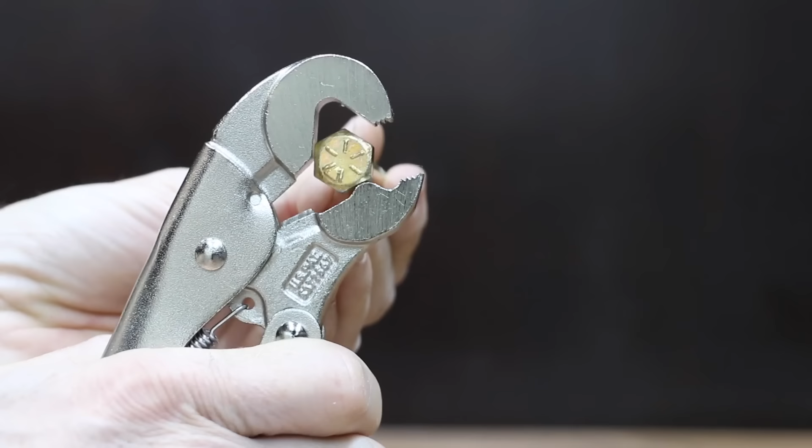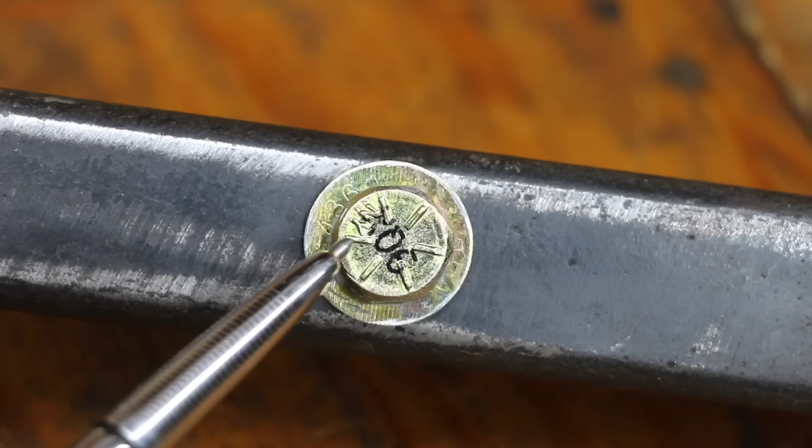I previously tested the socket style rounded nut extractors, but what about the wrench style, which allows you to work in a much tighter space? We have a bunch of different brands, with the least expensive brand only costing $14 and the most expensive brand $469. In the first test, we'll see which wrench performs the best on undamaged bolts. Then we'll see how they perform on partially and completely rounded bolts. Finally, we'll see which wrenches are the most durable.

At a price of $14, the least expensive brand we'll be testing is made by Irwin. Curved jaw delivers maximum gripping power and won't slip or strip any style of nut or bolt. Built-in wire cutter to avoid having to switch tools. The locking wrench is 7 inches in length. The Irwin vice grip is made in Taiwan. If the fastener is in a tight spot, the size of the tool is a factor to consider. With a 7/16" bolt in the jaws, the vice grip needs a lot of real estate at 1.87 inches across.

Some of the tools we'll be testing claim to be designed for both rounded and undamaged bolts. So let's see how much damage is caused by using each of the wrenches on an undamaged 7/16" grade 8 fine thread bolt torqued to 78 foot-pounds. We'll also see how they perform on a partially and fully rounded bolt.

And the vice grips loosen the undamaged bolt without slipping. Unfortunately, the vice grips did cause a small amount of damage to the previously undamaged bolt. And the vice grips lost grip on the partially rounded bolt at 62 foot-pounds. A close look and the jaws actually stretch as they lose grip. 20 foot-pounds on the completely rounded bolt.

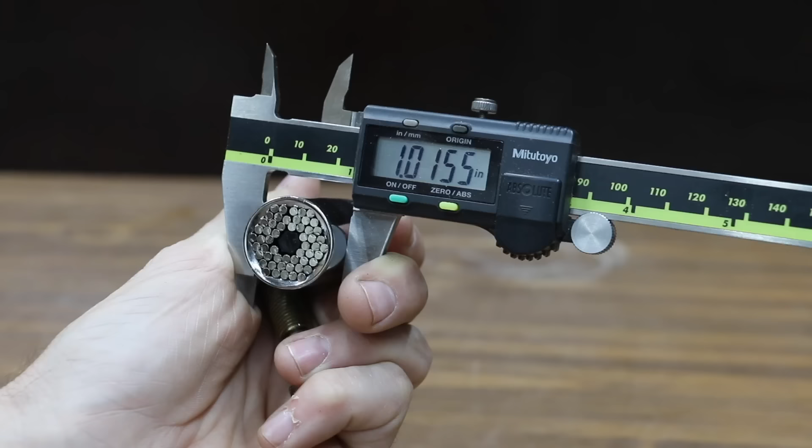At a price of $15 is this locking adjustable wrench that's made by Stanley. The wrench is 10 inches or 250 millimeters in length. Stanley claims that this wrench will allow for a tight grip on rounded fasteners to prevent the wrench from slipping off during use. Fits fasteners up to 1.25 inches in diameter. The Stanley is made in China. 2.03 inches for the locking adjustable wrench.

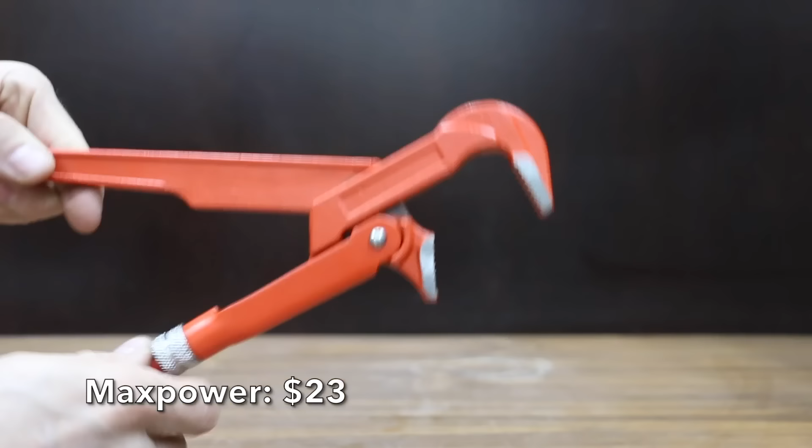And the locking adjustable wrench made easy work of the undamaged nut. As the bolt reaches loosening torque, the wrench jaw stretched enough to cause damage to the corner of the bolt. And the locking adjustable wrench lost grip on the partially rounded bolt at 43 foot-pounds, or about 19 foot-pounds less than the vice grips. And there's a small amount of damage to the wrench. And it made it to 16 foot-pounds on the completely rounded bolt.

At a price of $16 is this universal socket. The manufacturer claims that this one tool can replace the whole set. Fits fastener sizes 1/4 inch to 3/4 or 7 to 19 millimeters. It even comes with a power drill adapter. The universal socket is made in China. And the universal socket has the smallest diameter at 1.02 inches. And the universal socket successfully loosened the undamaged bolt, but the steel pins in the socket caused minor damage to the bolt. And the universal socket gave up early on the partially rounded bolt at only 9 foot-pounds.

At a price of $23 is this Maxpower brand Swedish pipe wrench. Maximum jaw opening is 1 9/16 or 40 millimeters. The wrench is 12 inches in length. It has a knurled steel adjustment nut. The Maxpower is made in China. And a pipe wrench uses the most amount of space yet at 2.3 inches.

And a pipe wrench has very aggressive teeth and caused a lot of damage to the bolt. The teeth on the pipe wrench also experienced some damage. And a pipe wrench is the first tool in the lineup to loosen the partially rounded bolt. And a pipe wrench is also the first tool in the lineup to successfully remove the completely rounded bolt.

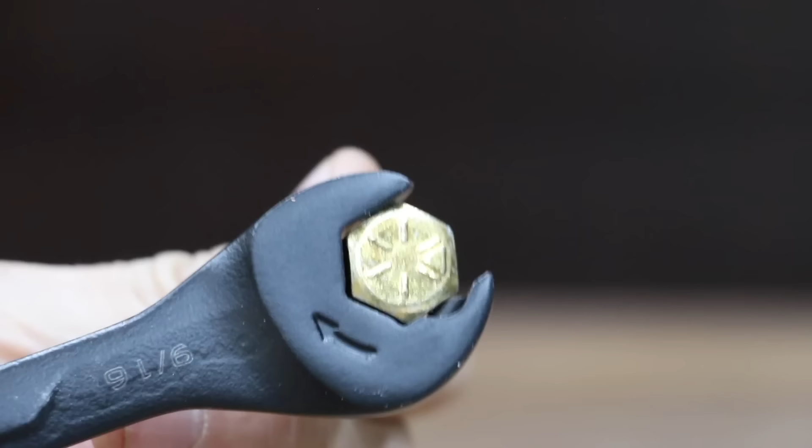At a price of $24 is this Duratech Universal Wrench set. The wrenches work with SAE or metric. Fit sizes 5 to 27 millimeters or 3/16 to 1 11/16 inch. The manufacturer claims that the wrench set works very well with rounded fasteners. The Duratech is made in China. 1.65 inches for the Duratech.

And the Duratech is able to loosen the undamaged bolt without a problem. However, the jaws on the Duratech do appear to be pretty soft, and there's quite a bit of damage to the jaws.

There's also some very minor damage to the bolt. And the Duratech lost grip on the partially rounded bolt at 33 foot-pounds.

At a price of $30 is this Crescent brand. It claims to fit 6 different fastener types, including hex, square, 12-point, E-Torx, partially rounded, and spline. The ratcheting end of the open wrench allows you to remove and apply nuts and bolts without removing the wrench. The Crescent brand is made in China. 0.987 inches for the closed end and 1.36 for the opened end.

And the Crescent made easy work of loosening the undamaged bolt, but the Crescent wasn't able to gain any traction on the partially rounded bolt.

At a price of $33 is this Bionic Wrench as seen on TV. The 6 jaws slide towards the center and lock onto the head of the nut or bolt. It claims to offer 14 wrenches in one. Fit sizes 7/16 to 3/4 or 11 millimeters to 20. The Bionic Wrench is made in USA. Very close to 2 inches for the Bionic Wrench.

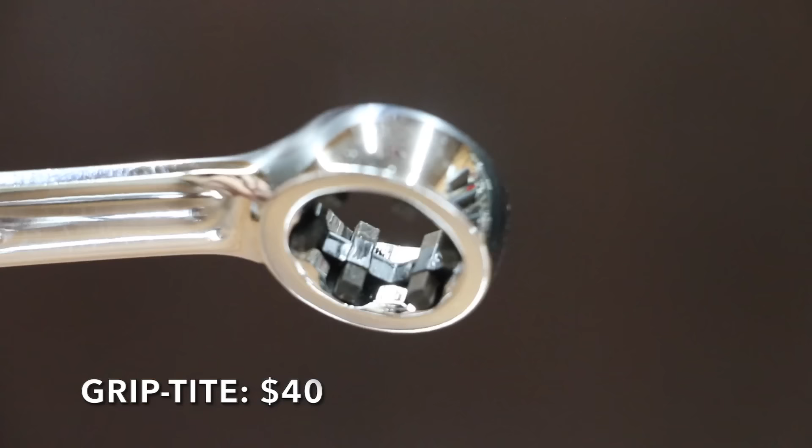And the Bionic Wrench will definitely get the job done if you have a Bionic grip. I gave the Bionic Wrench my best grip on the partially rounded nut and made it to 32 foot-pounds before losing grip. Unfortunately, the Bionic Wrench did experience some minor damage.

At a price of $39 is this Magic Wrench brand. It's a multi-purpose self-adjust double heads ratcheting all-in-one wrench. Fit sizes 9 to 45 millimeters. It claims it can remove nuts and bolts that have been completely stripped. The Magic Wrench is made in Korea. 2.31 inches for the Magic Wrench.

And I wasn't able to work any magic on the undamaged bolt, and the Magic Wrench lost grip at 48 foot-pounds. However, the Magic Wrench did mangle the previously undamaged bolt head.

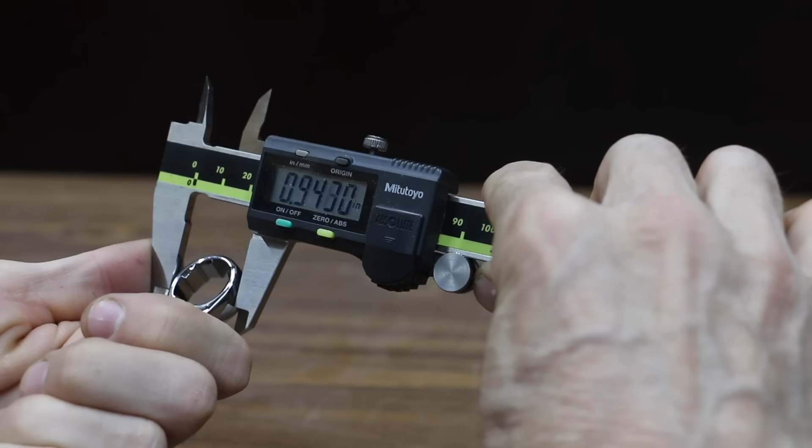At a price of $40 for 6 wrenches, or about $6.67 per wrench, is this Griptite brand. The open end of the wrench looks like a standard wrench. They claim that the wrenches can grip even rounded bolts. Some of the wrenches work with both SAE and metric. They claim that the more torque you apply, the harder the cams grip. There's no information on the packaging regarding where the Griptite wrenches are manufactured. 1.1 inches for the closed end and 1.37 for the opened end.

And the Griptite made very easy work of the first bolt, and it does seem to offer a very tight grip as the name implies. Unfortunately, the Griptite lost grip on the partially rounded bolt at 55 foot-pounds, which is just a little better than average. However, the closed end of the Griptite experienced 2 broken teeth and the wrench is now ruined.

At a price of $64 is this Olsa Tools Bolt Extractor Offset Wrench Set. 6 wrenches fit 12 sizes from 1/4 to 3/4 of an inch. It's a regular set of closed-end wrenches, but it has an innovative design that helps extract damaged nuts and bolts. The Olsa Tools is made in Taiwan. 0.94 inches is the most compact closed end yet.

And the Olsa Extractor wrench easily removed the undamaged bolt. And the bolt looks almost as good as new with a small amount of damage to one of the corners. And the Olsa Tools has more than enough grip to remove the badly rounded fastener, but the wrench just couldn't gain a good grip on the completely rounded bolt.

We previously tested the Rocket Socket brand, so let's test them again against these wrenches. Works with fasteners 1/4 to 3/4 inch or 6 to 19 millimeters. The Rocket Socket is made in USA, and the Rocket Socket is even more compact than the Olsa at 0.89 inches. And the Rocket Socket is designed to remove rounded bolts, and it did just fine on the undamaged bolt. As expected, the Rocket Socket did cause some damage to the bolt.

After a few light taps with the hammer, the Rocket Socket made easy work of the partially rounded bolt, and the Rocket Socket maintained a good grip on the fully rounded bolt, and the bolt finally loosened at just over 56 foot-pounds.

At a price of $90 or just over $3 per wrench is this GearWrench brand. Nothing fancy about the closed end of the GearWrench, it's just a 6-point combination wrench. We'll see how the GearWrench performs against some of the other styles of wrenches. They claim that their off-corner loading reduces fastener rounding.

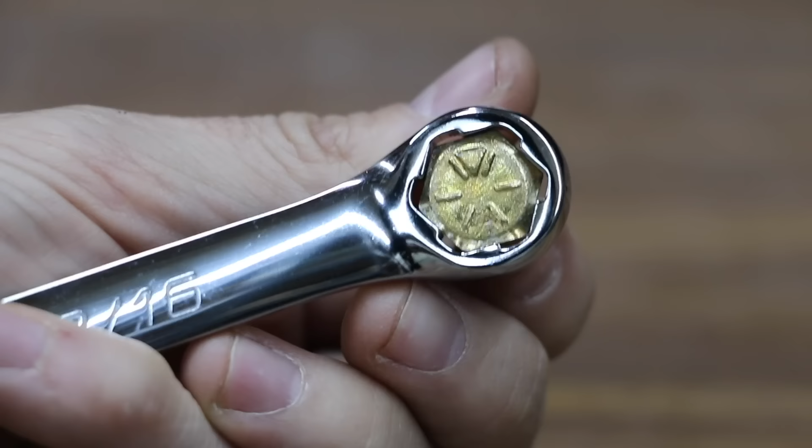The GearWrench wrenches are made in China. 0.95 inches for the closed end and 1.28 inches for the open end is the most compact yet. And a 6-point GearWrench has more than enough grip to loosen the undamaged fastener, and the bolt still looks as good as new. And the GearWrench repositioned itself to take advantage of the flat areas on the partially rounded bolt. And the GearWrench just wasn't able to gain any traction on the completely rounded bolt.

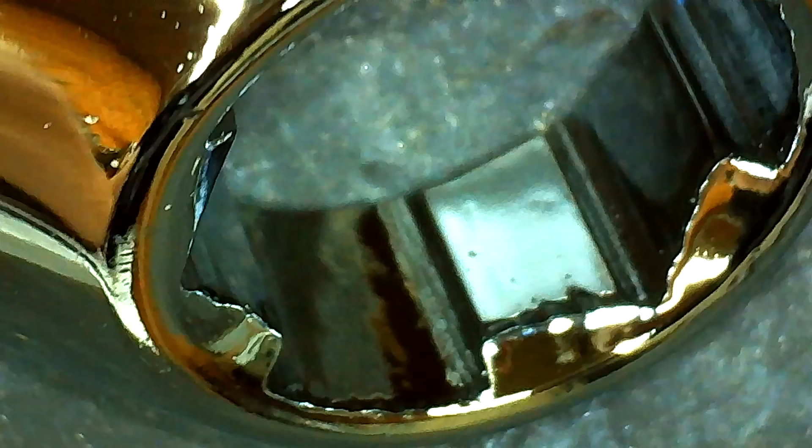At a price of $98 for 8 wrenches or $12.25 each is this Capri Tools brand. Capri Tools claims that their wrenches remove stripped bolts up to 90% rounded. Sizes 5/16 to 3/4 of an inch. 40% longer handle for added leverage. The wrenches are made in Taiwan. 0.98 inches for the closed end and 1.37 for the open end.

And the Capri Tools maintain very good grip on the undamaged fastener. However, the wrench does apply a lot of pressure away from the corners, which causes damage to the bolt. A close look at the wrench, and it appears that the chrome plating on the wrench is crumbling. And the Capri Tools found plenty of grip on the partially rounded bolt, and the bolt loosened at 61 foot-pounds. Not enough surface area on the completely rounded bolt.

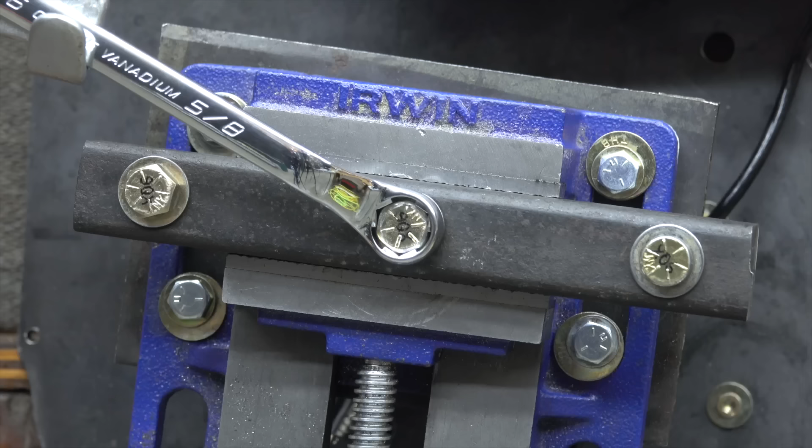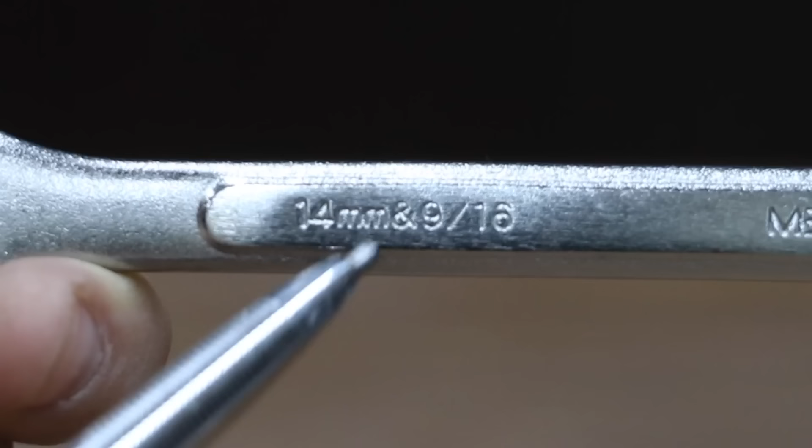At a price of $153 for 19 wrenches, or just over $8 each, is this MichealPro brand. It claims to be a bolt extractor set wrench and cushion grip socket set. Acts as a regular box end as well as an extractor wrench. They claim that their 6-point and 3-cornered box end design shields fasteners from damage under high torque situations. Grip sockets have patented cushions that prevent fasteners from damage. Includes sizes 6 to 19 millimeters and 1/4 to 3/4 inches. The MichealPro is made in Taiwan. 0.927 inches for the MichealPro is the second most compact wrench yet.

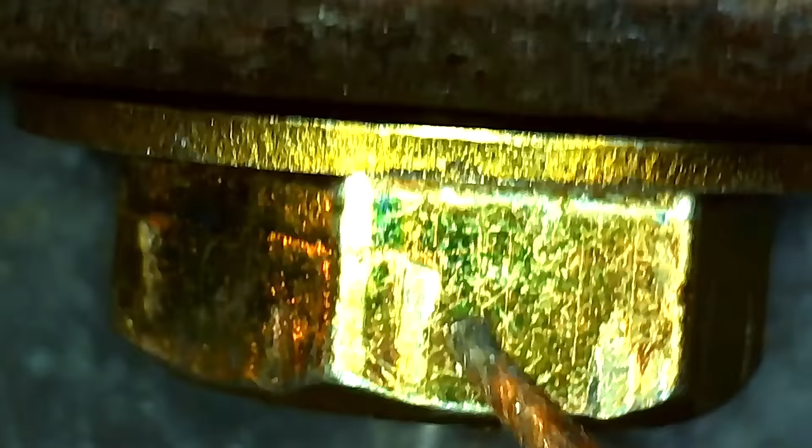And the MichealPro looks a lot like the Capri Tools, and it performed like it too, making easy work of the undamaged bolt. However, the MichealPro did hold up a lot better without any visible damage to the wrench. And the MichealPro has more than enough surface area to work with, and the partially rounded bolt began moving at 62 foot-pounds. And there's not enough surface area on the completely rounded bolt.

At a price of $190 for 14 wrenches or $13.57 each is this Metrinch brand. It claims to be equivalent to a 41-piece conventional set. They claim these wrenches handle standard, metric, and even ones with rounded and worn edges. Sizes from 8 to 22 millimeters or 5/16 to 7/8 of an inch. The Metrinch is made in Taiwan. And the Metrinch is pretty bulky at 1.05 inches for the closed end and 1.41 for the open end.

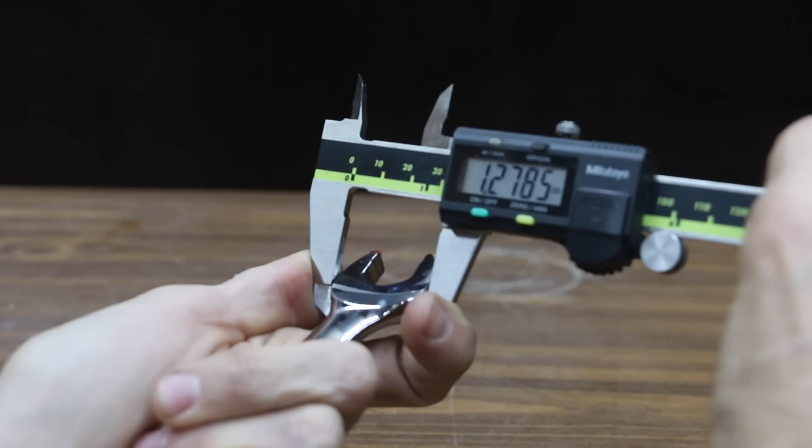And the Metrinch performed just fine loosening the undamaged bolt. However, the wrench does have a lot of taper, and the splines apply pressure to only about 70% of the bolt head. And a partially rounded bolt began loosening at 67 foot-pounds. And there's just not enough surface area for the rounded bolt.

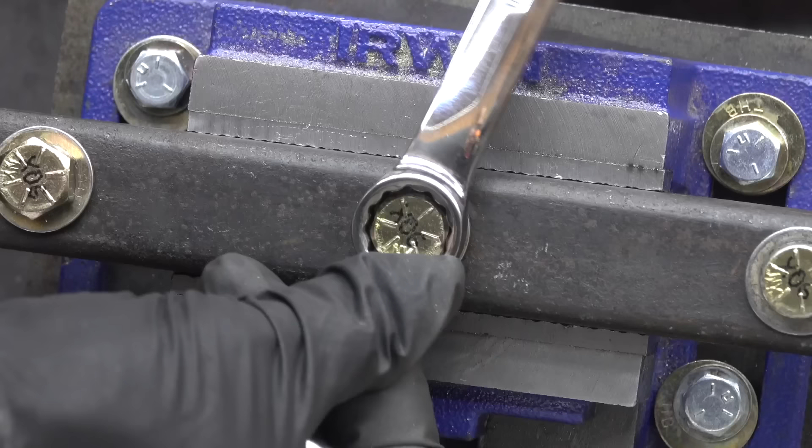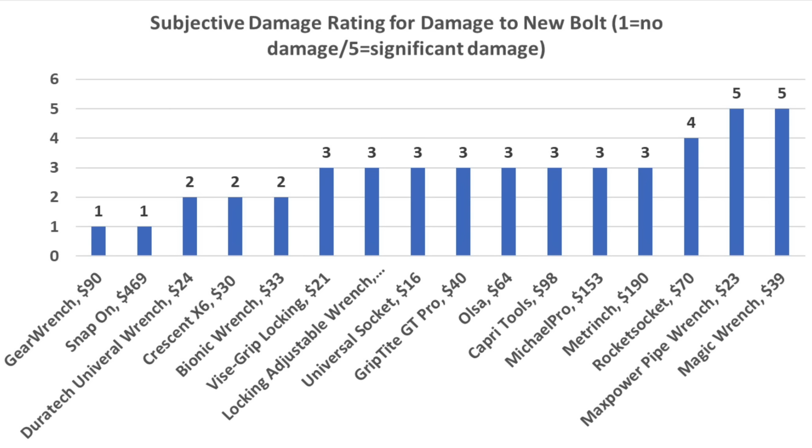And the most expensive brand we'll be testing, at an eye-watering price of $469 for just 7 wrenches or $67 each, is made by Snap-on. Snap-on claims that their Flank Drive Plus wrenching on the open end provides up to 62% more turning power and strength. Snap-on does not claim that these wrenches are specifically designed for rounded fasteners, but I've had a lot of people request that I test them. They claim that their box end provides up to 15 to 20% more turning power. The Snap-on wrenches are made in USA. 0.92 inches for the closed end and 1.28 for the open end is very well designed for tight spaces.

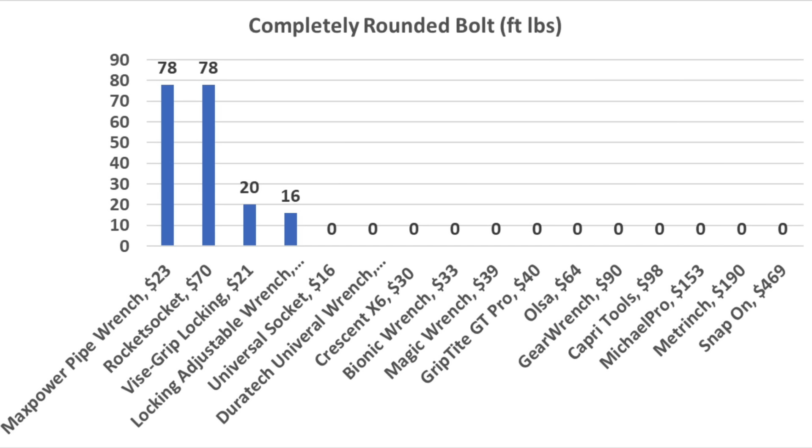And the Snap-on made very easy work of the undamaged bolt, and the bolt began loosening at 63 foot-pounds. The Snap-on wrench provides more than enough contact area to avoid causing any damage to the bolt. And the Snap-on just wasn't able to get a grip on the partially rounded bolt. No visible wear and tear with the Snap-on. So all of the tools were able to loosen the undamaged bolt except for the magic wrench.

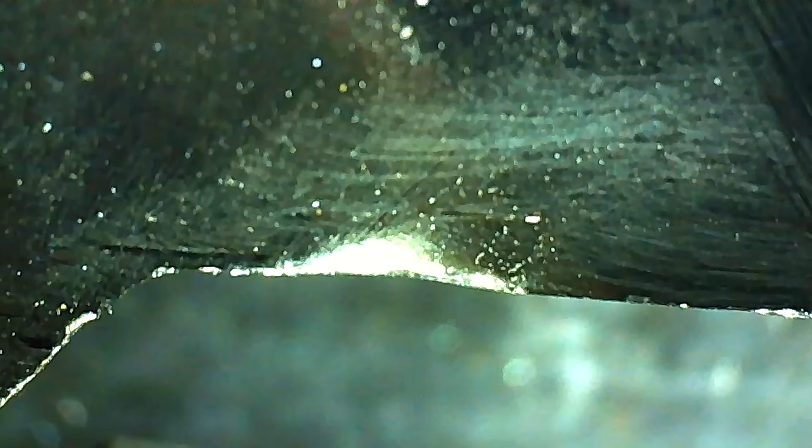Tool design can definitely have an impact on the durability of fasteners. While assessing damage is highly subjective, the GearWrench and the Snap-on cause the least amount of damage to the bolt with the best possible rating of 1. The number 78 on the chart indicates that the bolts were loosened. Only 7 of the 16 brands were able to loosen the partially rounded bolt. For the completely rounded bolts, only the pipe wrench and the rocket socket were able to loosen the bolt.

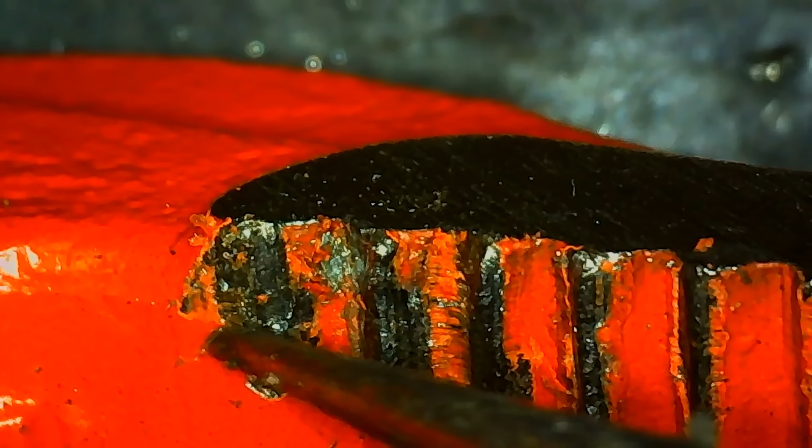Let's test the open end of the wrenches for maximum torque next using the same grade 8 bolts. With 3 points of contact, the Vise-Grips perform very well at 100 foot-pounds. And the Vise-Grips also perform very well on the partially rounded bolt at 49 foot-pounds. However, the Vise-Grips did experience some damage.

Adjustable wrenches have a well-deserved bad reputation for rounding nuts and bolts, but the locking design is really helping the Stanley. And 83 foot-pounds is pretty respectable. And the adjustable wrench performed fairly well on the partially rounded bolt at 41 foot-pounds. However, the adjustable wrench did experience some damage during the test.

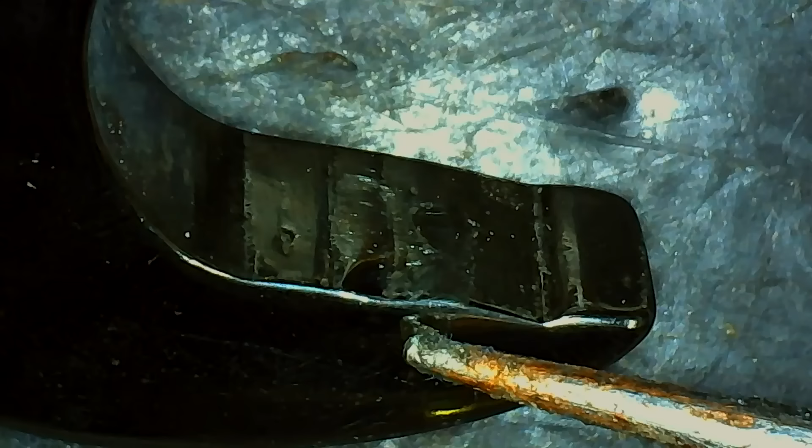Just like the Vise-Grips and the locking adjustable wrench, the pipe wrench is very large and not well designed for tight spaces. However, 99 foot-pounds is almost as good as the Vise-Grips. And the pipe wrench performed just as well on the partially rounded bolt at 99 foot-pounds. And the teeth on the pipe wrench did experience quite a bit of wear and tear.

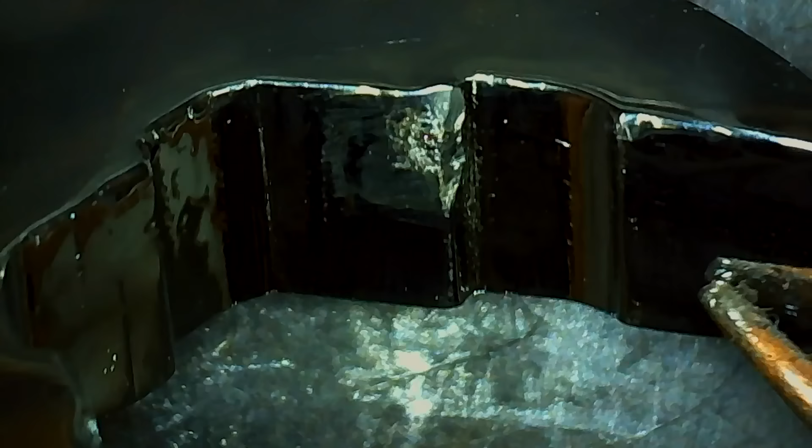Having a moving part on the jaws of a wrench seems like a problem waiting for a place to happen. And the Crescent made it to 93 foot-pounds when the wrench let go. And the moving part on the Crescent wrench broke and the open end wrench is now ruined.

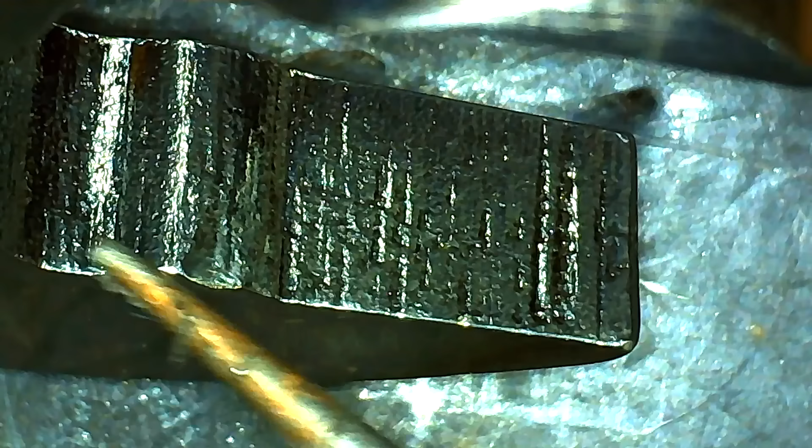And the Griptite performed well, making it to 75 foot-pounds on the undamaged bolt before losing grip. Unfortunately, the Griptite will never perform as well again since it experienced damage from the bolt. And the Griptite just didn't grip very well on the partially rounded bolt at only 15 foot-pounds.

And the GearWrench performed almost as well as the Griptite, making it to 73 foot-pounds before rounding the bolt. However, there's no visible damage to the GearWrench, which should help it on the partially rounded bolt. And the GearWrench performed quite a bit better on the partially rounded bolt at 23 foot-pounds to move into the lead.

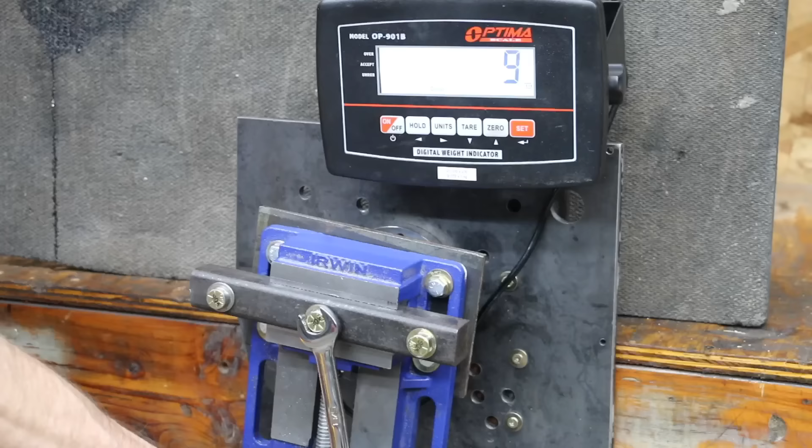And the Capri Tools performed the same as the GearWrench at 73 foot-pounds on the undamaged bolt. However, the high torque load did come at a cost with some damage to the wrench. And the Capri Tools gave up early on the partially rounded bolt at only 9 foot-pounds.

And the Metrinch performed far better than anticipated, making it to 88 foot-pounds before giving up. However, the high torque load did come at a cost with some damage to the wrench. And the Metrinch performed about average on the partially rounded bolt at 15 foot-pounds.

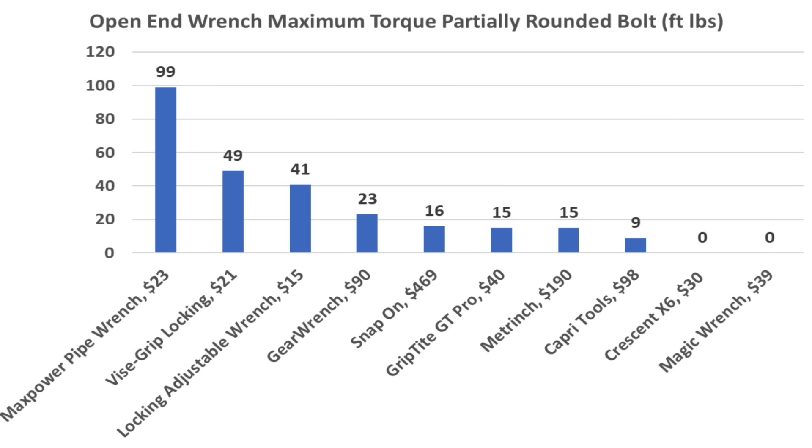And the Snap-on brand claims that the open-end design of their wrench gives it an advantage over the competition. Of all the combination-style wrenches, the Snap-on performed by far the best yet with a very impressive 97 foot-pounds before rounding the bolt. And the Snap-on held up very well with a small amount of wear and tear to the wrench. And the Snap-on made it to 16 foot-pounds before slipping on the partially rounded bolt.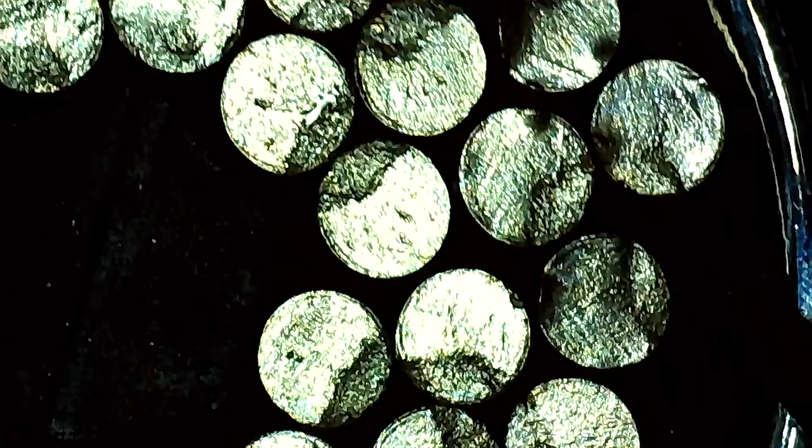Looking at just the open-end wrench performance, the vice grips came out on top at 100 foot-pounds, but the pipe wrench finished in a close second at 99. If you need a much more compact tool, the Snap-on performed almost as well at 97 foot-pounds. If you're dealing with a partially rounded fastener, an open-faced wrench is at a huge disadvantage, and the pipe wrench came out on top at 99 foot-pounds. The locking pliers finished in second at 49, and the adjustable wrench 41 foot-pounds.

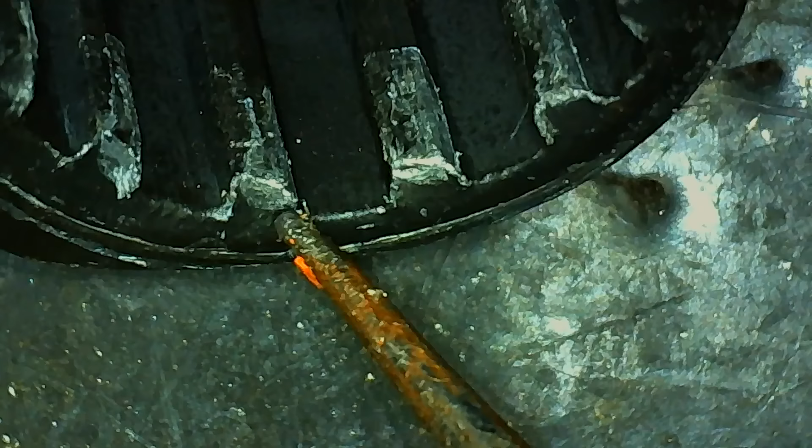Up next, let's compare the tools that make contact with all 6 sides of the fastener. And the Universal Socket made it to 80 foot-pounds before slipping, or 20 foot-pounds less than the vice grips. And the Universal Socket made it to 46 foot-pounds on a partially rounded bolt. However, some of the steel pins experienced some damage.

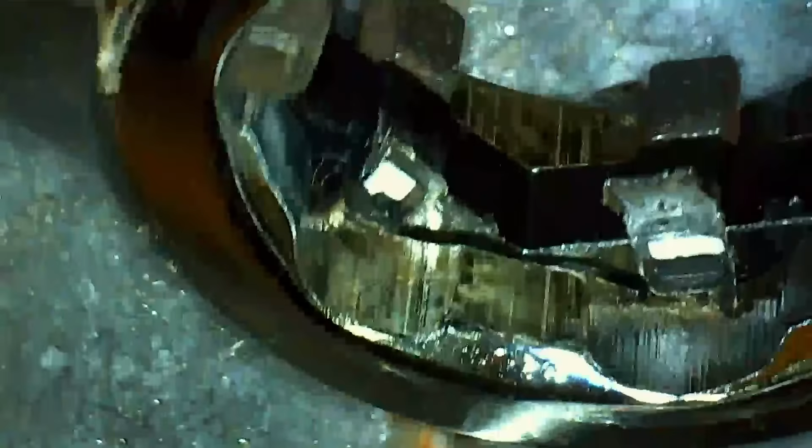And the Duratech makes contact with 4 sides of the bolt. And the Duratech performed well at 108 foot-pounds before losing grip. The Duratech previously lost grip on the partially rounded bolt at only 33 foot-pounds. Durability seems to be an issue with the Duratech, and it's pretty soft and experienced quite a bit of damage.

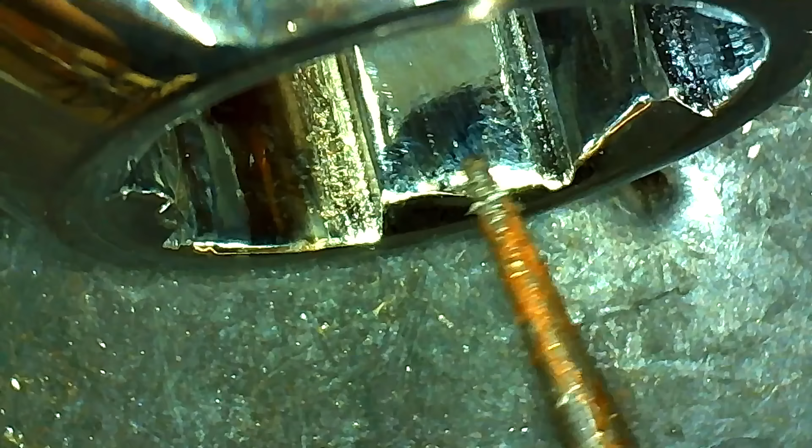And the Crescent is the first wrench to outlast the bolt, making it to 151 foot-pounds. And the bolt is just stretching, so I'll go ahead and stop the test. And the Crescent just isn't able to gain grip on the partially rounded bolt. Once again, durability seems to be an issue with the Crescent, as it did experience quite a bit of wear and tear. Since I don't have Bionic hands, I placed a hose clamp on the Bionic wrench to maintain a firm grip. Unfortunately, the Bionic wrench experienced a Bionic blowout and lost 2 teeth.

We'll go ahead and skip the Griptite since it's already experienced pretty bad damage. And the Olsa Tools has a 45-degree offset, which makes it challenging to keep the wrench fully seated on the bolt. The wrench has a tendency to want to roll to its side when applying a lot of torque. And the Olsa Tools made it to 103 foot-pounds before the wrench rolled to the side and lost grip. And the Olsa Tools actually performed better on the partially rounded bolt and maintained a much better grip on the bolt head. And the wrench outlasted the bolt, but the Olsa Tools did experience some minor damage to the teeth.

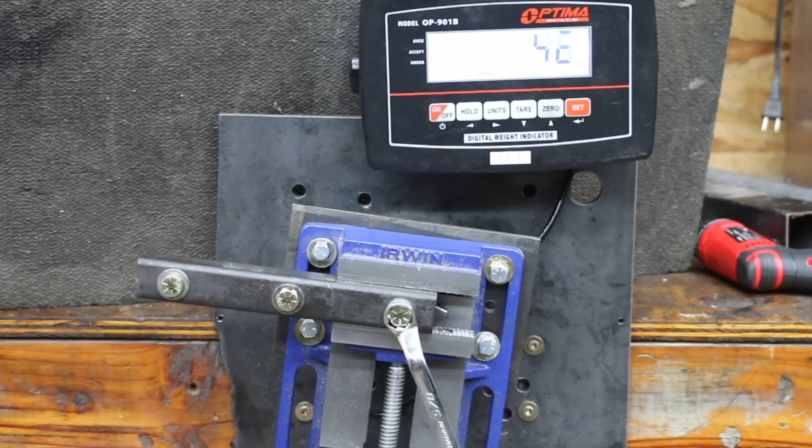We'll skip the Rocket Socket since it's only designed to work in a counterclockwise direction. And the 6-point GearWrench has a lot of taper, which really hurts its potential. And the GearWrench came off the bolt at 111 foot-pounds. And the GearWrench made it to 49 foot-pounds on the partially rounded bolt. The GearWrench did experience a small amount of wear and tear.

And the Capri uses a lot less offset than the Olsa Tools, and that really helped its performance. And the Capri Tools made it to 137 foot-pounds before the bolt began to stretch. And the Capri Tools performed very well on the damaged fastener, and it outlasted the partially rounded bolt. The wrench did experience some minor damage.

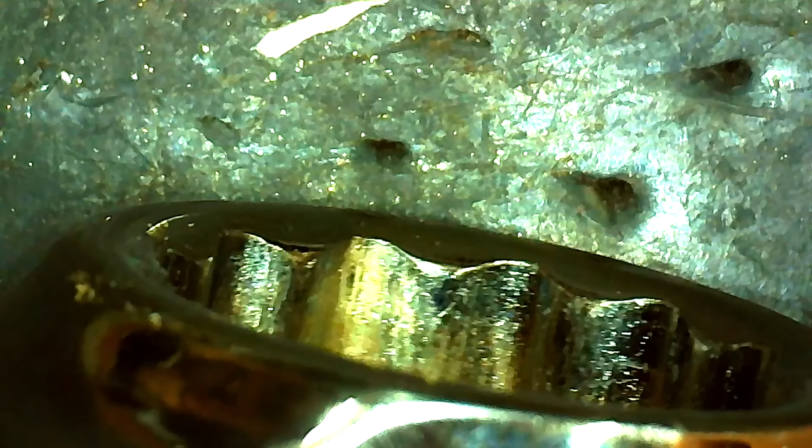Just like the Olsa Tools, the MichaelPro has a 45-degree offset. And the offset really hurt the performance of the wrench, and it rolled to the side after reaching 94 foot-pounds, just like the Olsa Tools. However, just like the Olsa Tools, the MichaelPro also outlasted the partially rounded bolt. The wrench did experience some minor damage.

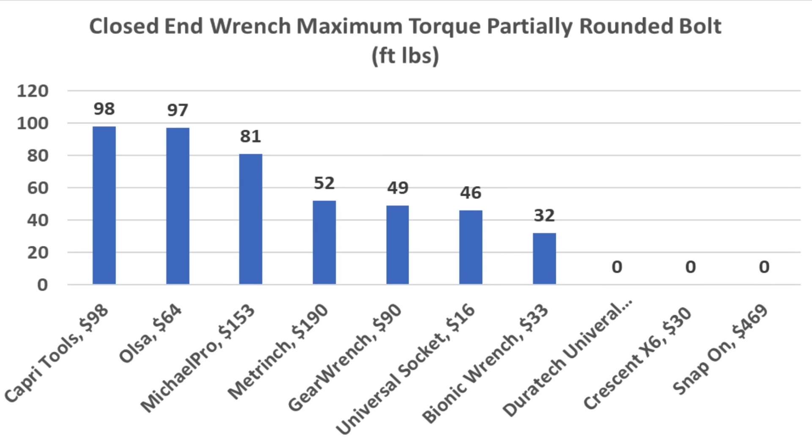And the Metrinch offers a very loose fit on the undamaged fastener. And the loose fit really hurt the performance of the wrench, and it rounded the bolt at 89 foot-pounds. And the Metrinch performed about average on the partially rounded bolt at 52 foot-pounds. And the Metrinch held up very well with very little wear and tear.

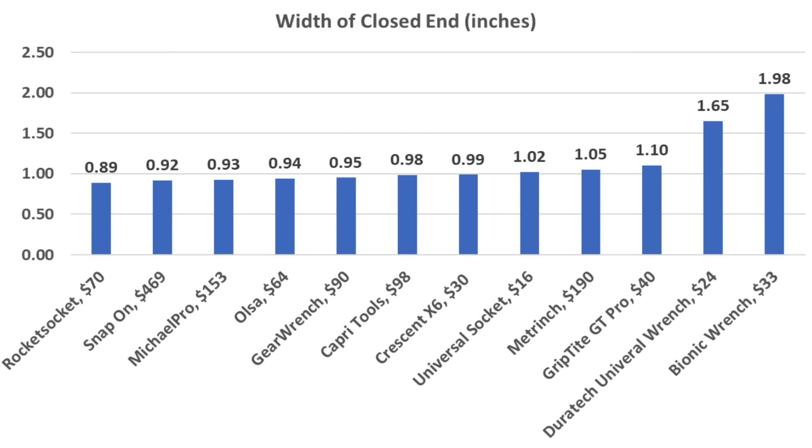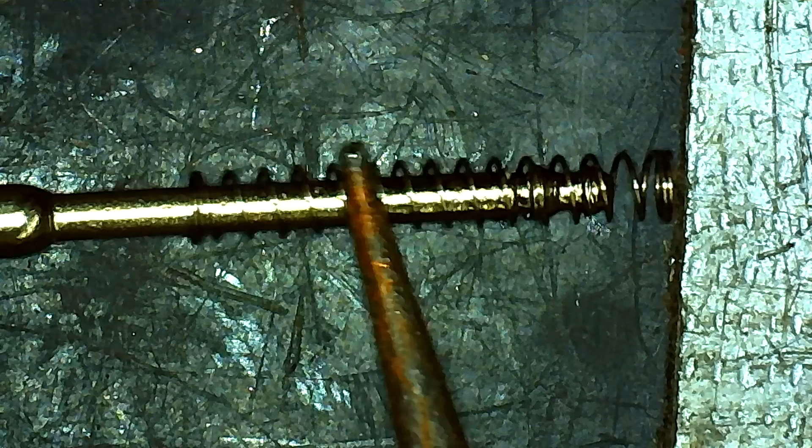And the Snap-on is designed specifically for undamaged bolts, and it outlasted the bolt at 122 foot-pounds. And the Snap-on just isn't able to gain a grip on the partially rounded bolt. And the Snap-on is still in really good condition. On an undamaged bolt, the Crescent, Capri Tools, and Snap-on are the only 3 wrenches that outlasted the bolt. However, the Olsa and the MichaelPro seem capable of performing better without the 45 degrees of offset.

On the partially rounded bolt, the Olsa, Capri Tools, and the MichaelPro are the only 3 wrenches to outlast the bolt. So the Capri Tools is the only wrench in this category to outlast the undamaged and the partially damaged bolt. Assessing tool durability is highly subjective, but the Rocket Socket, GearWrench, and Snap-on seem to have experienced the least amount of wear and tear.

If you're working in a tight space, tool size is a factor to consider, and the GearWrench and Snap-on have the smallest footprint on the open side of the tool. For the closed end of the tool, the Rocket Socket has the smallest diameter. However, the Snap-on, MichaelPro, Olsa, and GearWrench aren't too far behind. And I've always wanted to see what's inside of a universal socket, so let's go ahead and smash it and take a look inside. And it's a pretty simple setup with spring-loaded steel pins.

For the wrenches designed specifically for damaged nuts and bolts, I really like the Capri Tools the best. When you consider the price and the performance, it seems like a great choice.